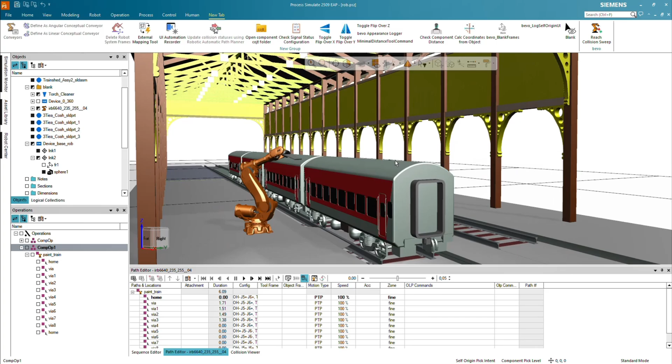Special project: grinding on a full-size railway wagon. Possibilities, challenges, reachability, collision check. With the right tools, "can we do this?" becomes yes, quickly and repeatably. I'll show how in Process Simulate.

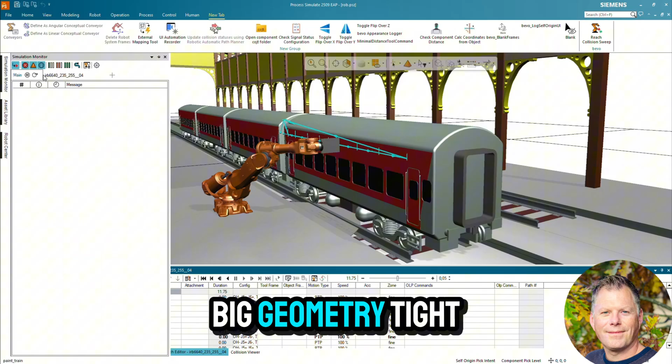Here's the station, wagon and robot. The first pass runs along the side as the robot sets up the grinding application. You can already sense the limits. Big geometry, tight clearances, long reaches. From this pose, not all targets are reachable.

Let's verify collision pairs. Robot versus wagon. So risky contacts are visible immediately. Now I launch my custom tool.

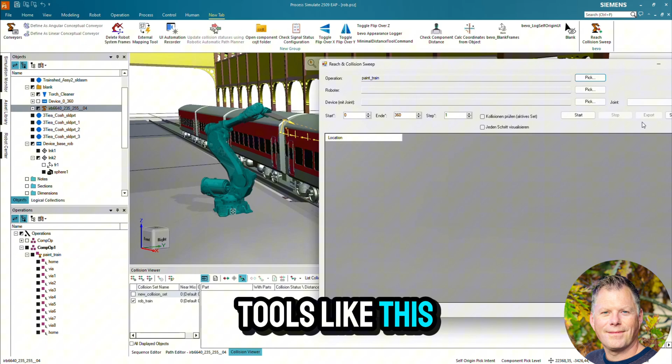I select the operations, choose the robot, and add the rotary device the robot stands on. I define the rotation range and decide whether collision checking should run during the sweep. Then I start the analysis.

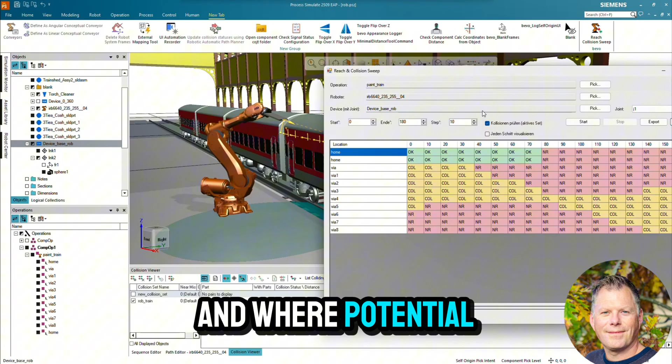The results table shows what's reachable, what isn't, and where potential collisions occur, mapped to each device angle. Here you can see collisions on the wagon. I resolve them step by step, adjusting the setup and approach so the robot can work safely.

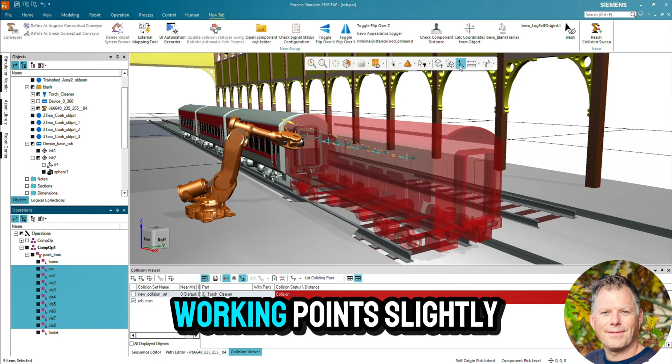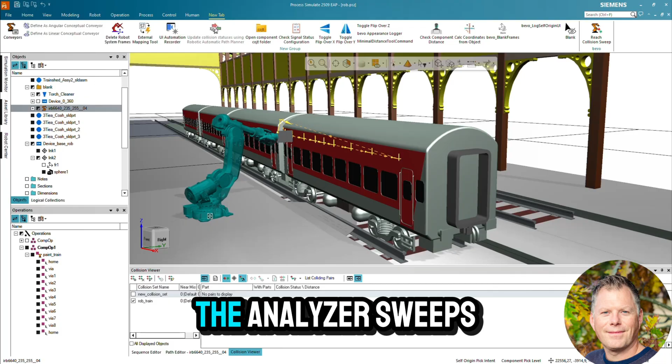I offset the working points slightly away from the surface. That creates clearance while keeping process accuracy. With the points cleaned up, I run the tool again. From 0 to 180 degrees in 10-degree steps. The analyzer sweeps the angles and checks reachability and collisions automatically.

Here's the updated table. Which targets are reachable at which angles? To validate interactively, I double-click a point, and the tool shows how the robot reaches it.

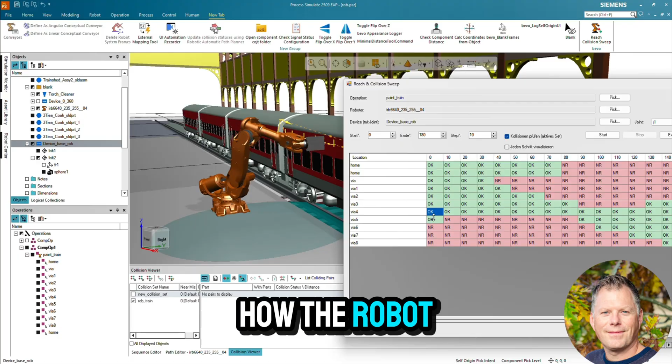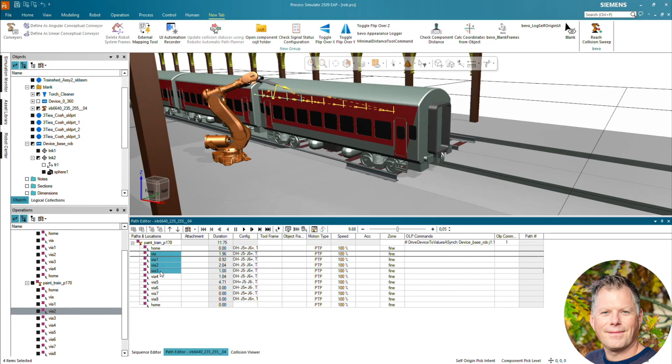Next, I optimize the paths for safe motion, smoothing transitions, tightening blends, and confirming there's no interference. The result is a clean, collision-free run. The remaining sections of the wagon are processed the same way. Reachability ensured, collisions resolved, paths ready for execution.